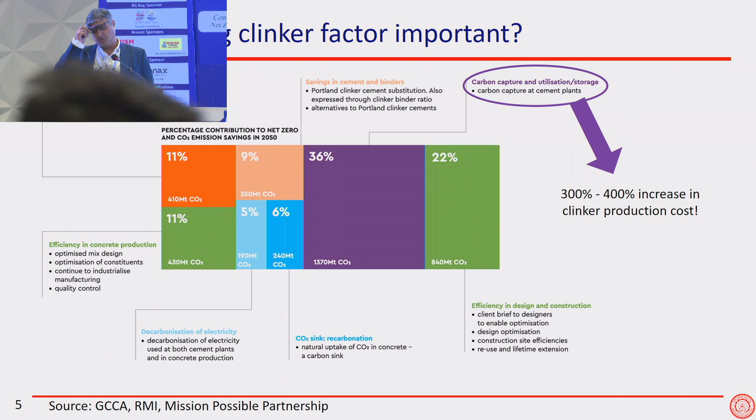We do not want to rely more on CCUS. We'll have to have CCUS, but to reduce our dependence on it, we'd have to have lower clinker content in our cements, because sustainability is important. But if we reduce clinker content, we increase the risk of carbonation and corrosion. We may have problems of durability, and structural safety and durability are more important, even though sustainability is important. So let's see how we can balance the two and achieve a good approach.

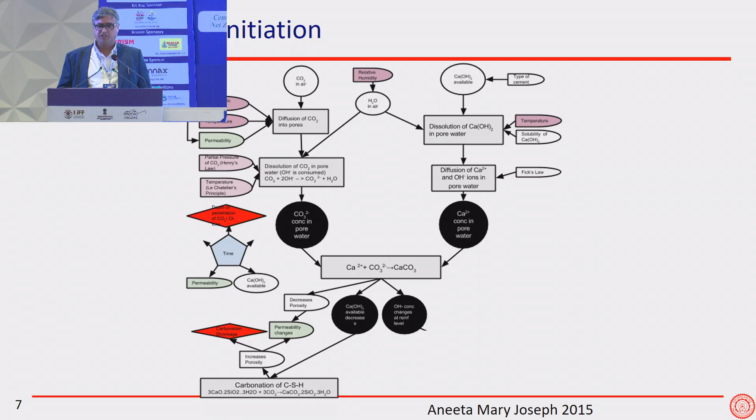When we started working on this issue, around the time we were starting the LC3 project, I had been thinking of trying to model all of these deterioration processes in concrete, because modeling is what I really love to do. So I told one of my students, go and draw me a simple short graph of what carbonation is, how carbonation happens.

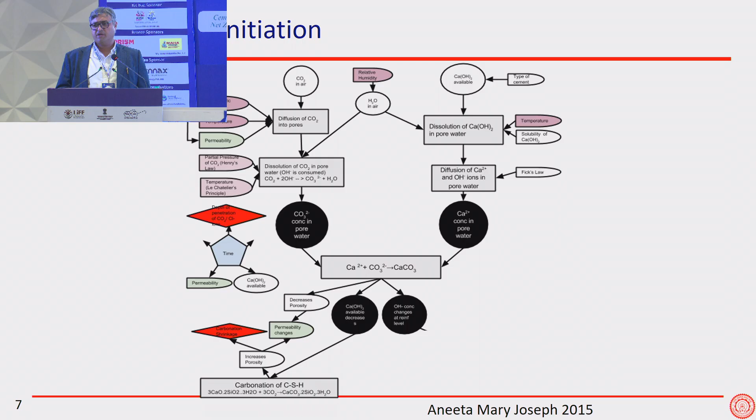She went away and did not come back. I kept calling her, she did not come back. She came back after some time and gave me this very complicated graph. I'm only showing you half of the flow chart, not even the other half. It's a complex process -- this is what I realized.

I used to think this is something very simple: CO2 goes in, reacts, and that's it. But then we realized there are so many steps to carbonation. There's diffusion of carbon dioxide, dissolution, reaction, diffusion of lots of other things including moisture, and precipitation of carbonates. Lots of things can happen.

CO2 goes in through the pores because CO2 likes to fly, it doesn't like to swim. If you have a bottle of Coke and you open it, the carbon dioxide escapes, which means carbon dioxide would not like to remain within water -- it would like to escape. It goes through the air and goes inside the microstructure only through the unsaturated pores.

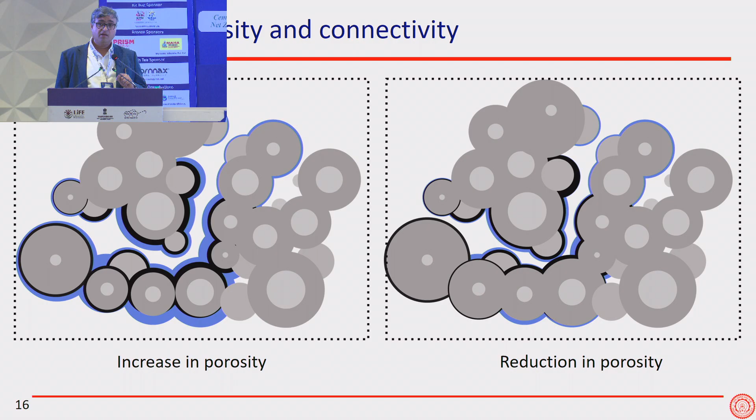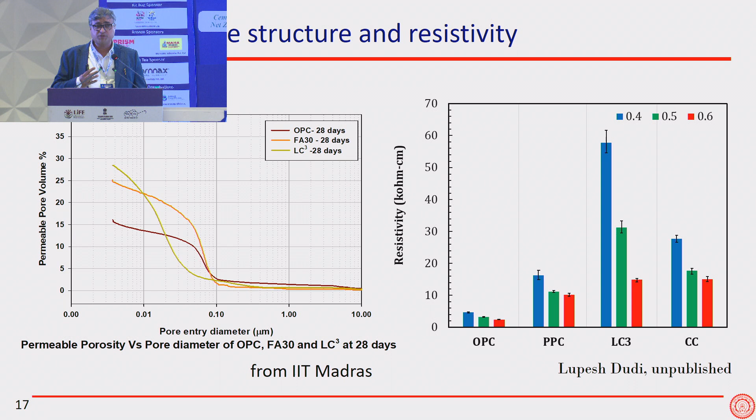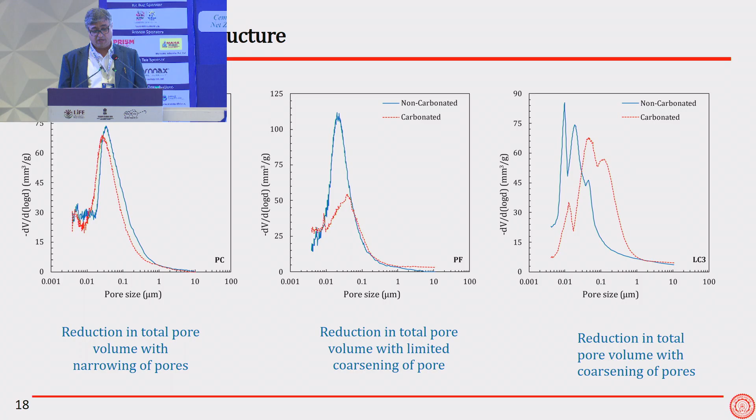Now, when we talk about these blended cements, be it fly ash-based cement, PPC, or LC3 or composite cement, we know that the permeable porosity of these cements has a finer pore size. The resistivity of concretes made using these cements is high. But after carbonation happens, these pores become coarser. This is something we have to clearly understand. Pores become coarser in all blended cements because of the process we've just talked about.

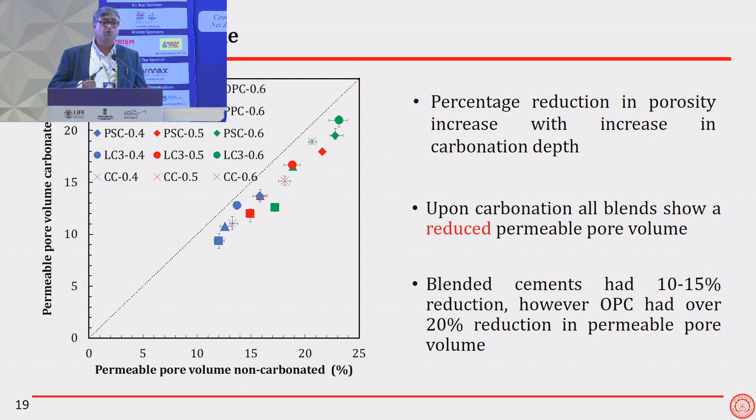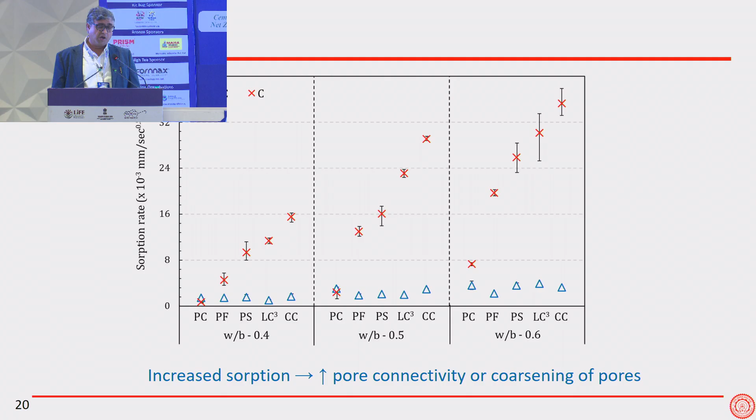Even though the total permeable porosity might reduce, because of the change in the microstructure you get more connected pores, and the carbon dioxide may be able to go in more easily. Because the pores are better connected - compare the blue ones with the red carbonated ones - the water gets in more easily, the air gets in more easily into the concrete after carbonation.

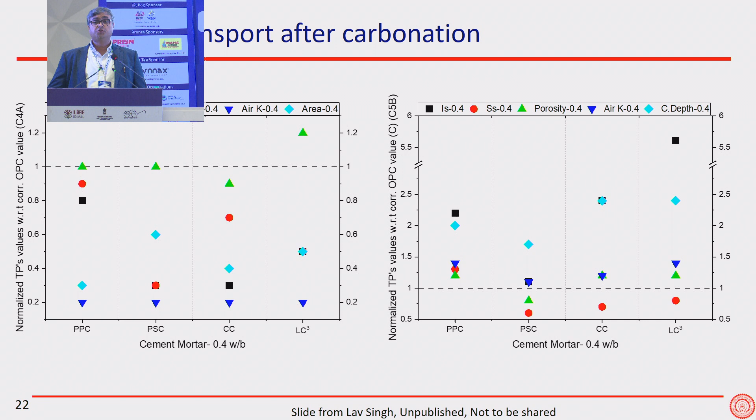So we need to take care of that, which means all of these blended cements on the left, when they used to have lower transport properties before carbonation, after carbonation the transport properties can be higher than OPC. That means all of our experience of 200 years of OPC is a waste. We cannot extrapolate from that experience to design our structures using blended cements - any of them, even PPC by the way - and because the corrosion rate is going to be higher as well in that case.

Now, something very simple that all of us know about, but don't practice so well, is the control of water to cement ratio. Here you see 3 different water to cement ratios in the vertical graph: 0.4, 0.5, 0.6. You have the different cements on the y-axis, and you see that if you reduce the water binder ratio, you would be able to reduce the depth of carbonation. That is something very important.

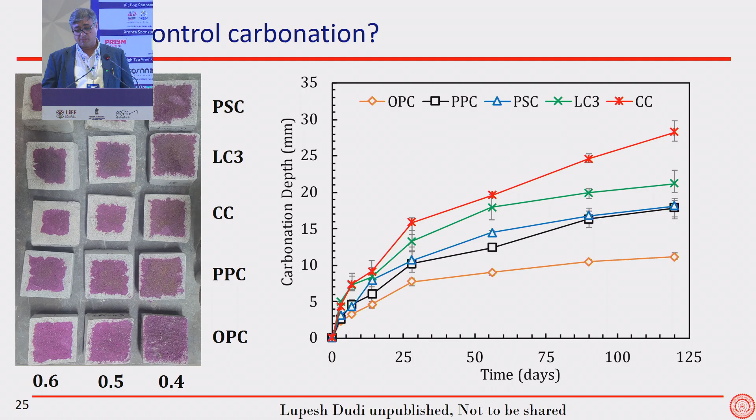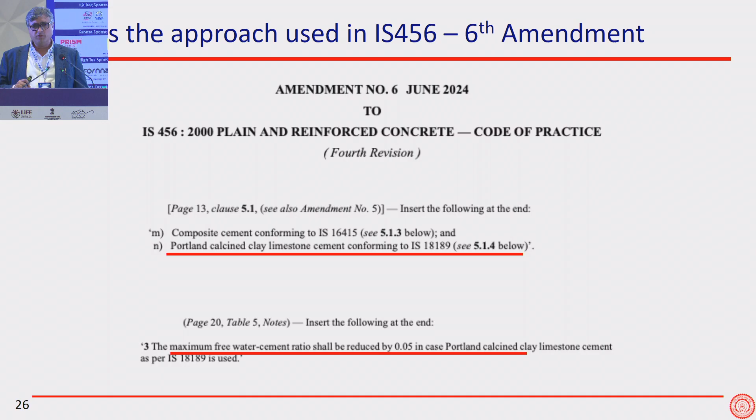That is a simple way in which you can control the depth of carbonation in any blended cement, which is why when we amended IS 456 to include limestone calcined clay cement, and now I feel it should be there looking at the data for composite cements too, we asked that the water to binder ratio be reduced by 0.05. I must tell you frankly that the current recommendations of water to binder ratio in IS 456 are good. The problem is our current construction practices do not always meet those requirements. The standards try to be on the safer side most of the time, which is why we have to reduce this. If you just take the values given in the code and follow them religiously, you're not going to have these problems. But because we do not follow them religiously, we have to do things like this.

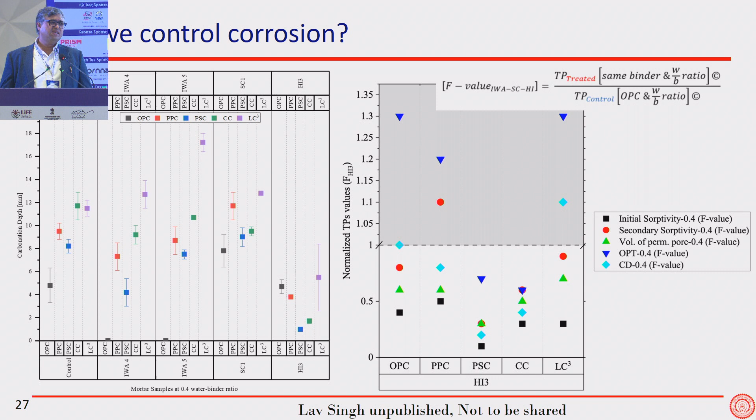But there are other ways of solving the problem of potential corrosion or carbonation as well. Here we are showing some results using different waterproofing compounds. Our idea was that if you have low clinker cements which get carbonated faster, if we can mix waterproofing compounds and prevent moisture from getting in, at least we can protect against corrosion. That's what our idea was. But then after we mixed in these waterproofing compounds, we found that even the carbonation reduces.

So with some of these waterproofing compounds, after the concrete cures a bit - 10 days, 15 days, a month, whatever - you come with a brush or a roller and apply this compound on the surface. This could be a hydrophobic compound, for example. Just apply this on the surface of the concrete, and carbonation depth reduces.

And the carbonation depth reduces because even for carbonation, you need moisture. You have to have a layer of moisture around the cement particles for it to dissolve and react with the carbon dioxide, and even that process is slowed down. What you notice is not just the carbonation depth reduces, but because you're reducing carbonation, you're also reducing all the other transport properties in the concrete, which means that by a simple application on the surface, we can get a concrete that is durable in carbonation conditions.

We can go down to those low clinker factors safely. But then a lot of this work has been done in the lab and not in the field. We wanted to see what's happening in the field. So we were very fortunate.

We had an old building on the campus, 50 years old, that we were going to demolish. So what we said was - I asked my student to stand inside the building when it was being demolished. No, not really. But I asked him to take samples from there and measure the carbonation depth. Most of the concrete was fully carbonated, at least beyond the reinforcement.

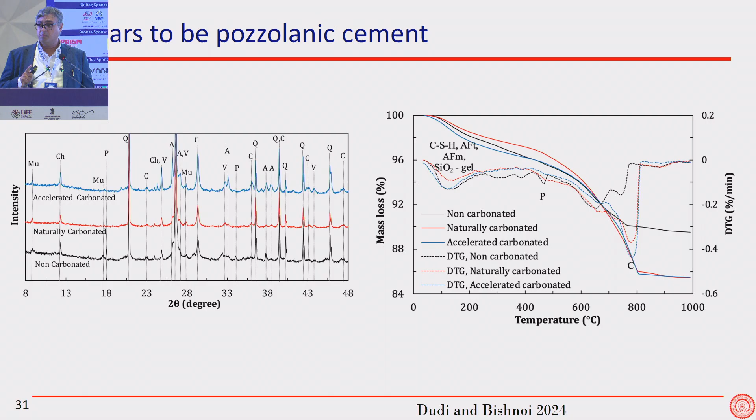Despite all of the concrete being carbonated, only at 20% of the locations was there actually corrosion. So what Lupesh did was take out samples, measure half cell potential and rate of corrosion, but he actually also took out the reinforcement to see if it had actually corroded after 50 years of service in Delhi. Delhi has some of the worst climate, well, worst climate full stop, but worst climate for carbonation as well.

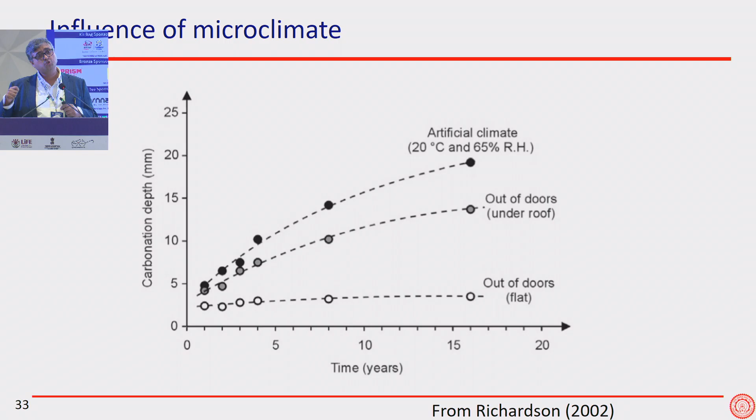So we also found that it all depends on the microclimate. We were able to identify which locations in a structure suffer the most from the risk of corrosion. We know this kind of graph already, so I'm not going to spend time on that, but the microclimate is what is important.

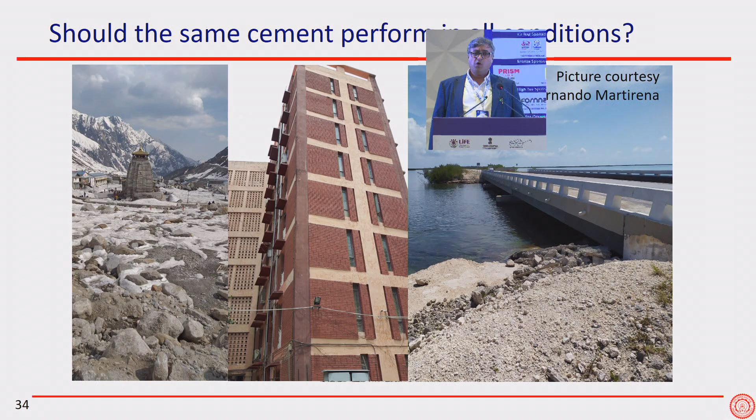Now, I said that safety is important, durability is important. Yes, it's important, and we need to find solutions to all of that. I think we have solutions to those things, but there is one more thing we really have to think about: do we really, if we want to achieve sustainability, want to use the same type of cement everywhere? Do you wear the same clothes when you come to this meeting as when you go to sleep?

No. Do you use the same kind of vehicle when you want to exercise as when you want to transport yourself, or when you want to travel to America versus when you want to come to Yashobhumi? No, you don't. You use different products for the same industry for different things. The cement industry and the engineers have to become smarter in that way.

On the left, there's a picture of Kedarnath. We had a project there, if you know about it, the Adi Shankaracharya Samadhi that was made there, supported by JSW Cement at that time, and not just JSW Cement but the whole group. There, the requirement is freeze-thaw resistance. The next building in the middle, the horrible one, has been in the terrible weather in Delhi. The one on the right is a beautiful bridge that goes to these beautiful islands in Cuba, exposed to chlorides. Should we use the same cement everywhere?

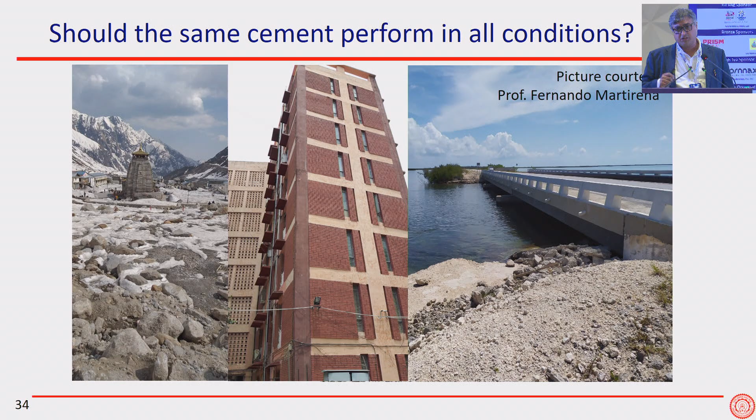Even in the same house, should you use the same cement in your foundation as you're using in your drains? This is a question we have to ask, because if we have to get to sustainability and reduce the clinker content, we have to have solutions for specific applications. We know that all of these blended cements, they're very good in some conditions, but can be worse in others. For example, they're very good in chlorides, so we should start using them in chloride conditions. Engineers are supposed to know what to use where. You're not going to put a beam where there's a column.

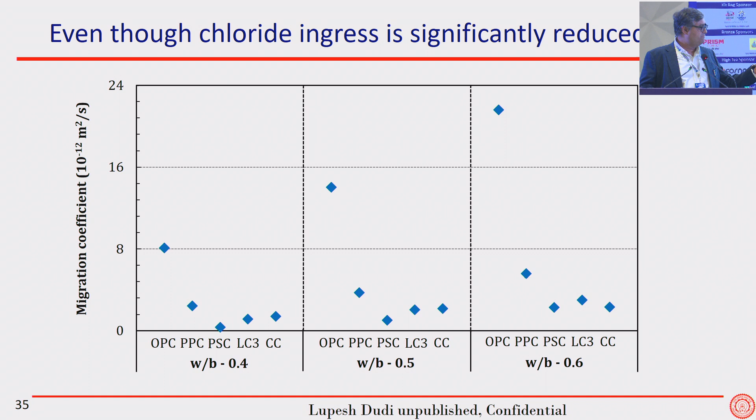I'm finished. 20 seconds? 20 minutes? Okay, seconds. So, should we worry about carbonation?

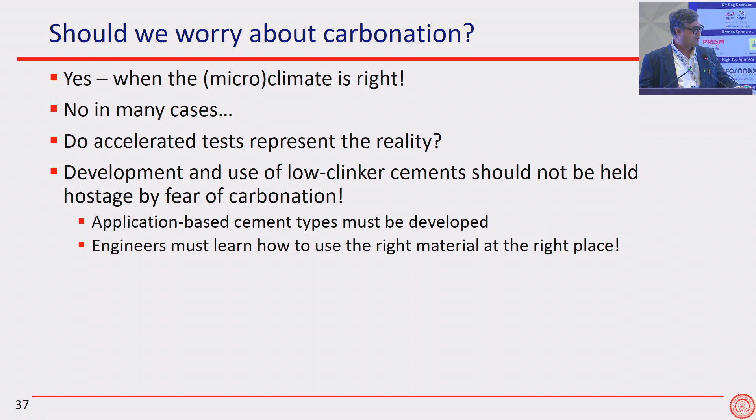Congratulations, it was as usual a fantastic presentation. Thank you, maybe this one was even better. Oh really, okay, really impressive. Thank you so much. I matured well, I think.

It was a very nice presentation, and as a keynote speaker you covered carbonation, its impact, porosity, the relations, and also with blended cement, what can be the impact of carbonation and how to get rid of using that. One thing that was very important, I have seen that to reduce the impact of carbonation through waterproofing. So I want to understand in detail, if you can, maybe after this session.

I have a guy called Love Singh sitting here. Love, raise your hand, taller. So Love Singh is the guy who did all the work. Yeah, so hire him to...

So just one question: if we want to reduce carbonation with the help of waterproofing chemicals, what is the reactivity happening, and how can you avoid carbonation with the help of this waterproofing chemical?

This is something that may take a longer discussion. We could not understand it at first, but we've recently seen literature from Maruyama in Japan. What they're showing is that you have to have the right relative humidity even for carbonation to occur. So if you're able to subdue the relative humidity, you can even reduce carbonation in concrete, and the pH remains high. This may be related to that, but we were very surprised at the results.

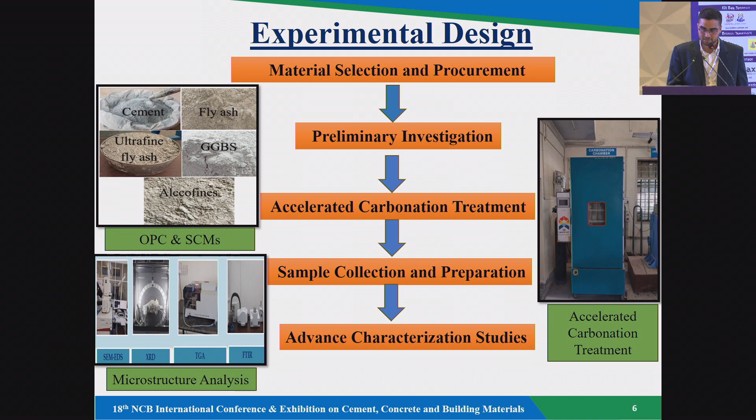In this study, we have taken fly ash, ultrafine fly ash, granulated blast furnace slag, and Alccofine, the finer version of GGBS, followed by accelerated carbonation treatment, and performing certain microstructure analysis and phase quantification. The materials used here follow the Indian standards from OPC to Alccofines.

The experimental work is as follows. The carbonation curing regime is followed by certain standard references, and we performed advanced characterization studies using scanning electron microscopy, energy dispersive X-ray spectroscopy, Fourier transform infrared spectroscopy, and thermogravimetric differential thermal analysis.

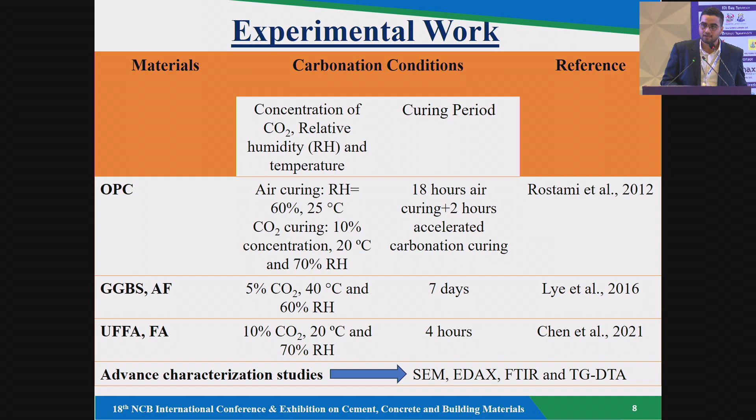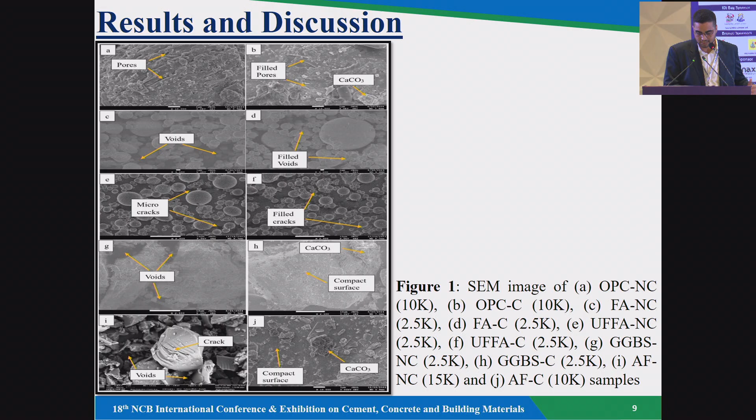The results and discussions are as follows. These are the SEM images from A to J, showing certain carbonated and non-carbonated SCMs. We can observe that in the case of non-carbonated samples, there is an irregular and non-uniform surface with certain voids observed, whereas for the carbonated samples, the presence of tobermorite or CSH as well as CaCO3 is predominant.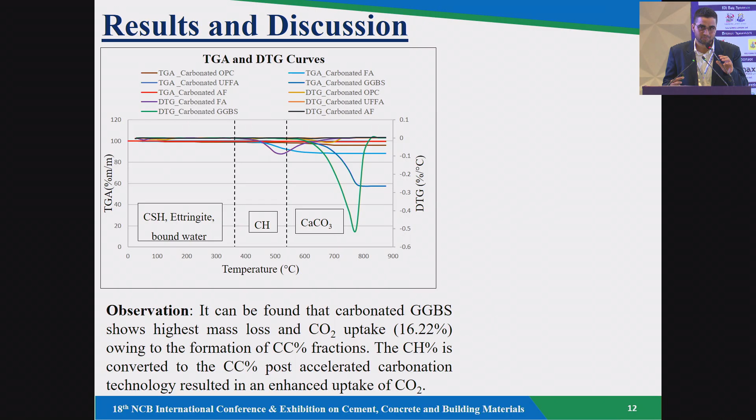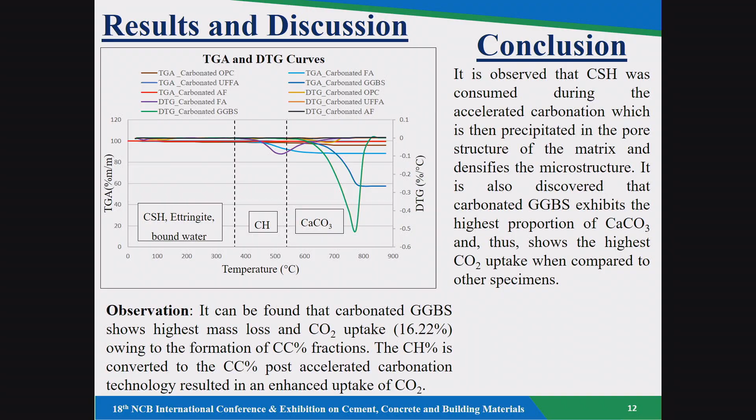Now the conclusions. Following all these microstructure analyses, it has been observed that the CSH was actually consumed during the accelerated carbonation and converted to calcite phases, be it calcite, vaterite, aragonite, and all these phases densified the microstructure. It has been discovered that the carbonated GGBS exhibited the highest proportion of CaCO3, resulting in an enhanced CO2 uptake of the developed composite. Thank you.

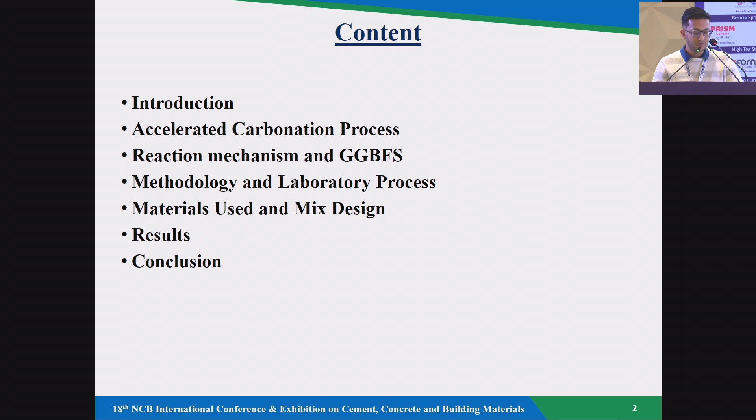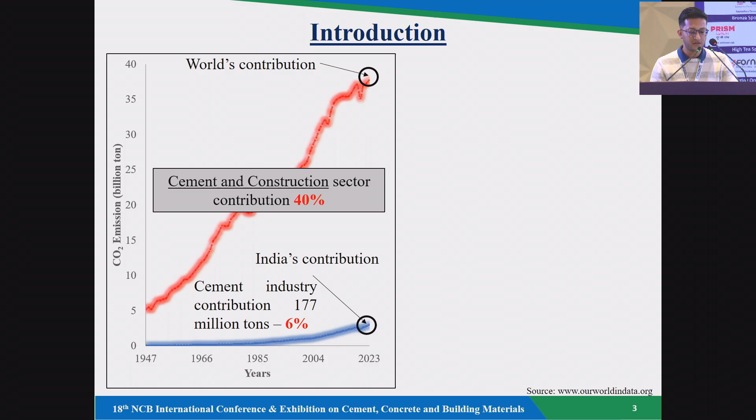As we know, the CO2 emission has been on an increasing trend with rapid urbanization. Currently, if we talk about the cement industry only, the world contributes about 38 billion tons, whereas in India the cement industry contributes 177 million tons, which is approximately 6%. If we consider the construction sector along with the cement industry, the total CO2 emission contribution is 40%.

So in light of some targets in various forums like COP21, the Race to Zero campaign, and COP26, we need to minimize the CO2 emission. So we need to have some mitigation techniques.

If we don't use the mitigation techniques and we follow the same trend, by 2050 we will be having 2.34 gigatons of CO2 emission, and with mitigation techniques we can limit it to 1.5 gigatons. So what are the mitigation techniques?

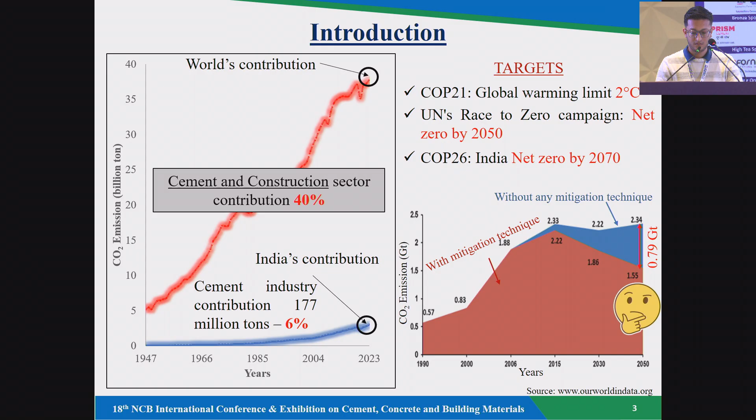There are some mitigation techniques like alternate fuels and raw materials, improving efficiency of cement rotary kilns, supplementary cementitious material, and carbon capture and utilization. Among these, CCUS has been identified as one of the major efficient mitigation techniques which can reduce the CO2 emission.

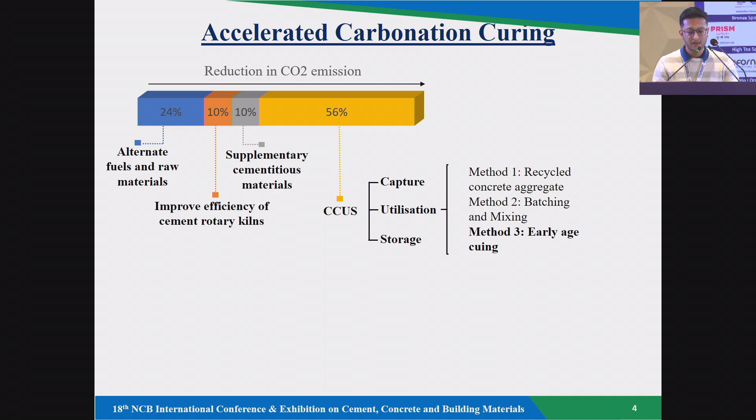CCUS in concrete can be used in three methods: in recycled concrete aggregate, batching and mixing, and early age carbonation curing. So I will be talking about accelerated carbonation curing, which is also known as early age curing.

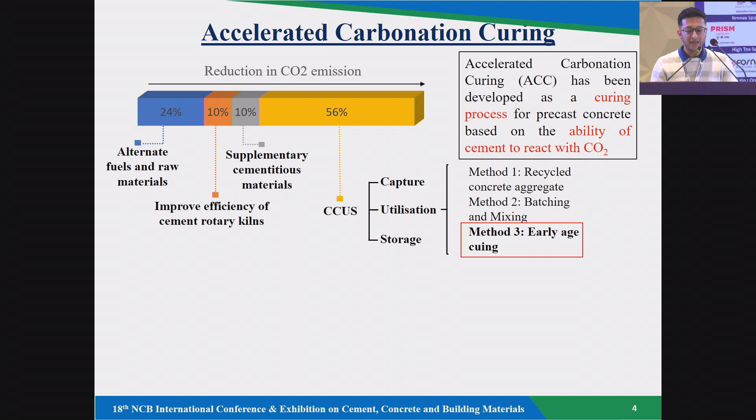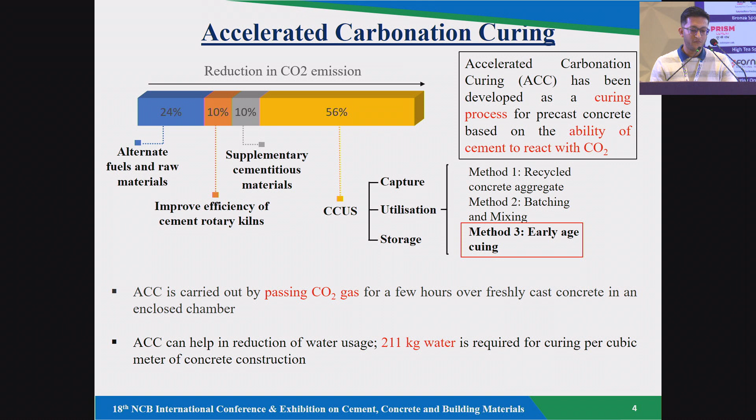Accelerated carbonation curing has been identified as a curing process for precast material in which CO2 is basically exposed to freshly prepared concrete. By using the accelerated carbonation curing procedure, we can also reduce the use of water, as we don't have to use it for water curing as well.

So what is the reaction, how is it different from water curing and CO2 curing? In water curing, the major products are CSH gel and calcium hydroxide, whereas in CO2 curing, the unhydrated and hydrated compounds, when reacting with CO2, give us CSH gel and calcium carbonate.

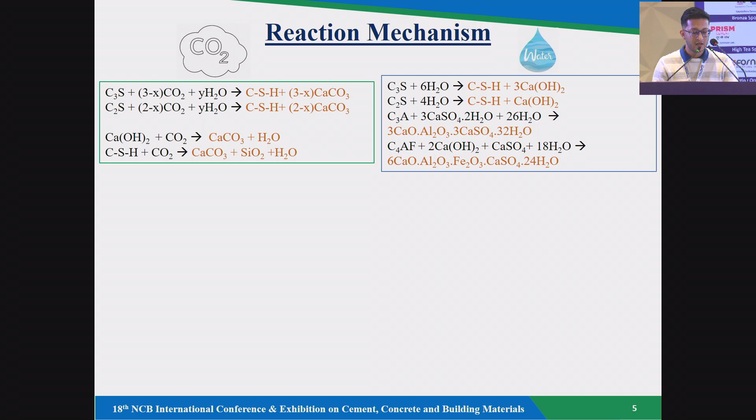Also, one objective of using SCM is that efficient use of SCM will diminish the carbon emission associated with Portland cement. Another objective is to minimize environmental effects such as waste, by efficient utilization of industrial solid waste.

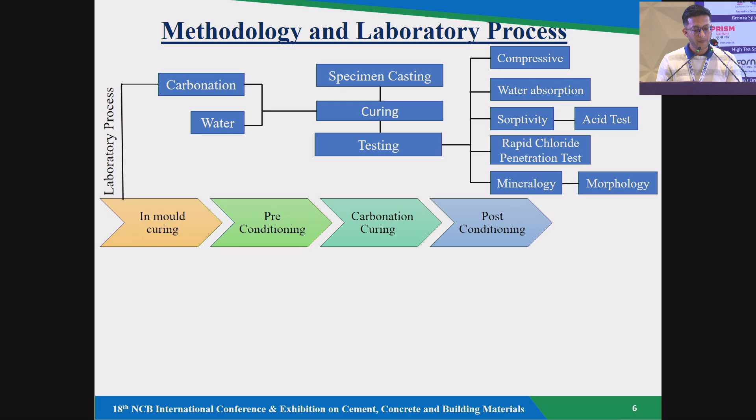The methodology adopted: specimens were casted, and two types of curing were given—carbonation curing and water curing. Some basic tests were done like compressive strength, water absorption, sorptivity, acid test, rapid chloride penetration, and microstructure testing like mineralogy and morphology. In carbonation curing, the laboratory process followed 4 steps.

First step was in-mold curing, then preconditioning, followed by carbonation curing for 12 hours, and then post-conditioning. In post-conditioning, 3 days of water curing was given, followed by sealing in plastic wrap till the testing age.

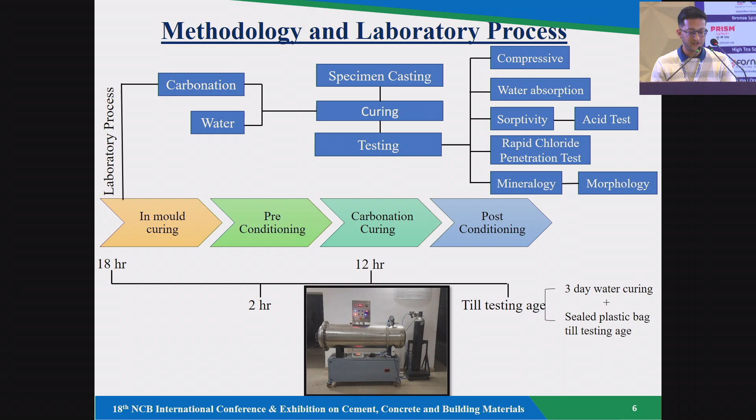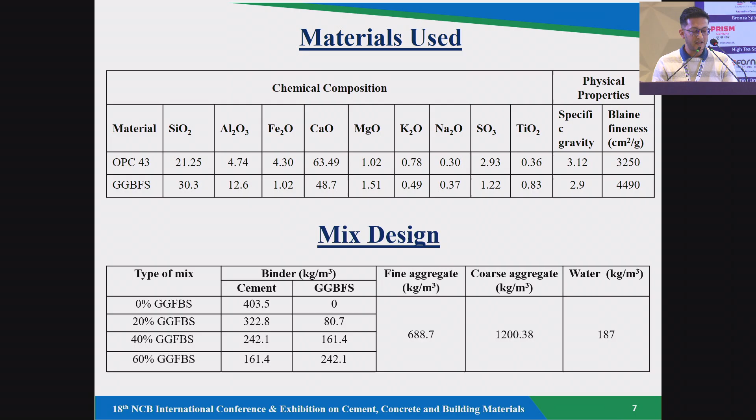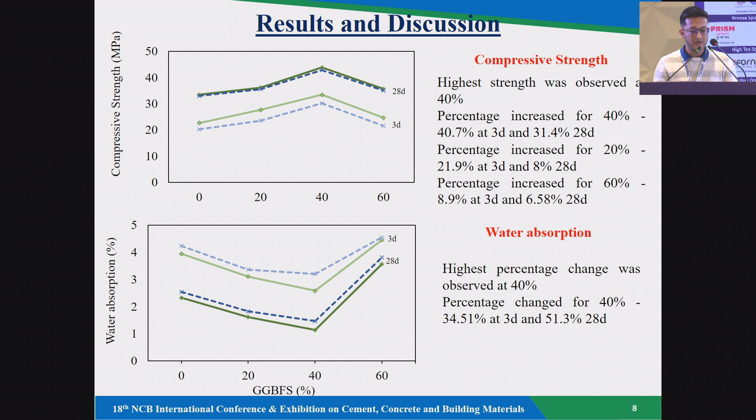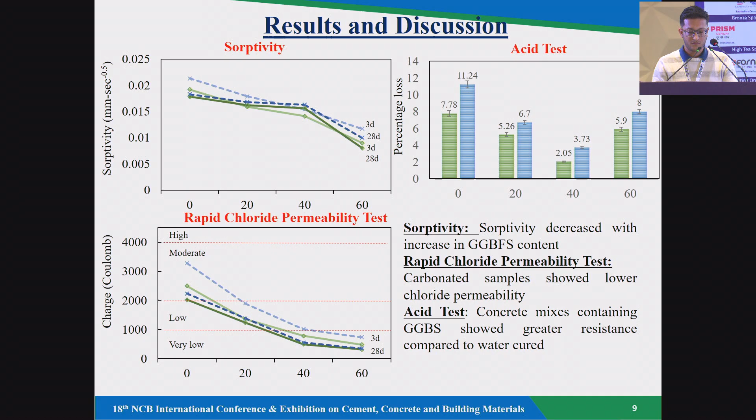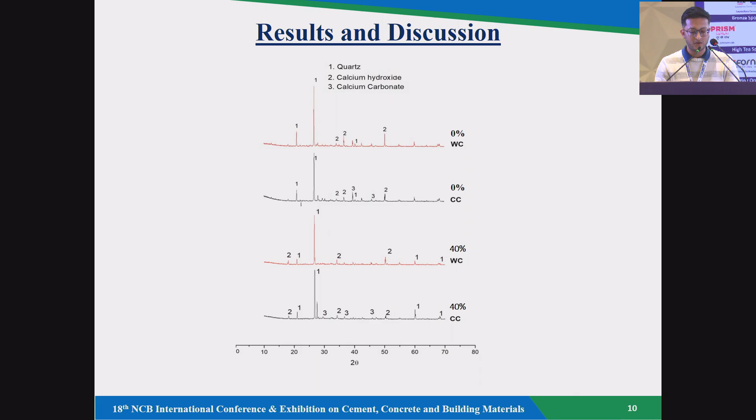In the XRD results for microstructure, we tested the 40% GGBS mix. It shows calcite peaks in the carbonation-cured samples as compared to water-cured samples. In the morphological testing, calcium hydroxide was observed in the water-cured sample, whereas in the carbonation-cured samples, a denser microstructure with calcium carbonate was observed.

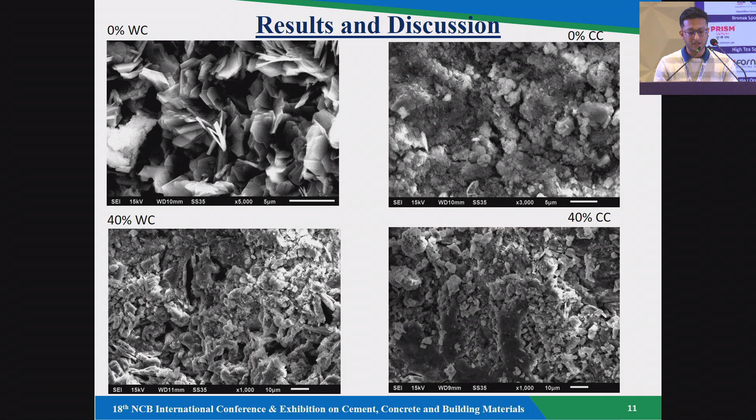Conclusion: the highest strength was found in the 40% replacement. Therefore, it can be said that 40% was the optimum replacement level of the GGBS in the concrete.

Water absorption of carbonation cured samples was lower than the water cured samples at all ages. Chloride permeability of carbonation cured samples was significantly lower than the water cured samples.

In the microstructure, the calcium hydroxide phase was reduced significantly, while there was a considerable increase in the calcium carbonate phase, as indicated in the XRD test. A denser microstructure was observed in the SEM images of the carbonation cured samples.

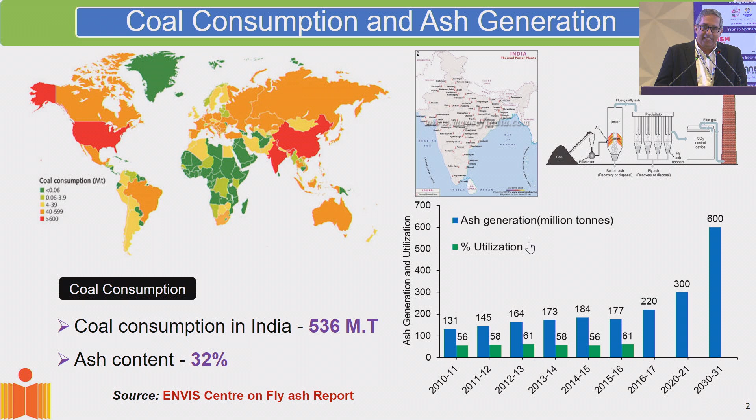It's the best way to produce power, and so we're going to produce a lot of fly ash because of that. Now the question is, even the fly ash that we have, are we using it effectively? Which means we need to understand what fly ash brings to the table.

Now, what we did is we collected fly ash from different sources across India and did the oxide analysis. The oxide analysis reveals that the composition is primarily similar. If you just go purely by the oxide composition, it's going to be very similar across the different fly ashes. You can't pick out the differences.

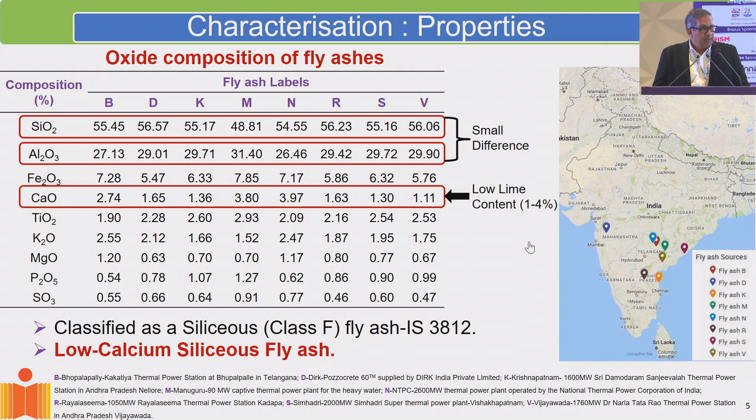Typically, our fly ashes contain very low calcium. This has consequences, as I'll explain a little later.

But then from the known stoichiometry, you can actually determine the crystalline phases like mullite and quartz, in which silica and alumina are present in crystalline form, predominantly in a non-reactive form. They have known stoichiometry, so you can subtract out the amount of silica and alumina present in those forms, and determine the reactive oxides that are present in the glassy phase of fly ash.

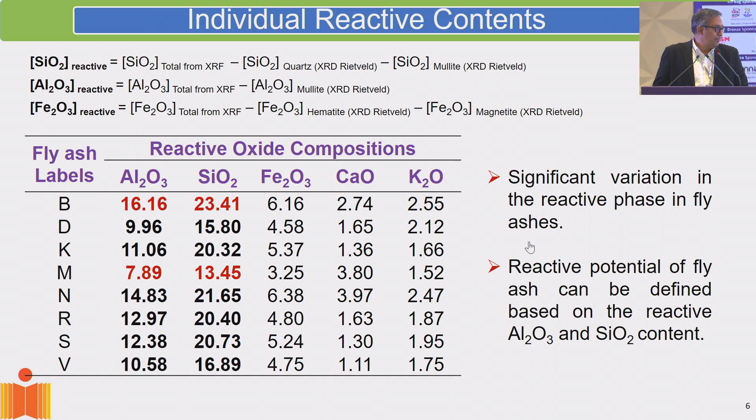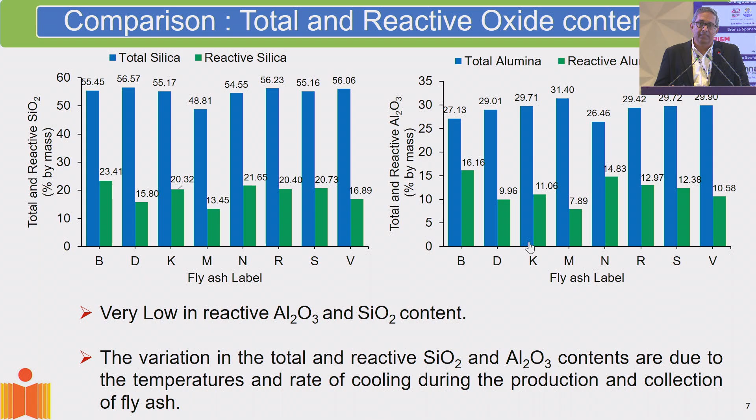Now, the reactive part is what we're interested in. That's what we can count on if we're going to do any kind of replacement reaction. The other thing is, if you're going to do alkali activation, it's the alumina that plays the key role, particularly when we're talking about geopolymers.

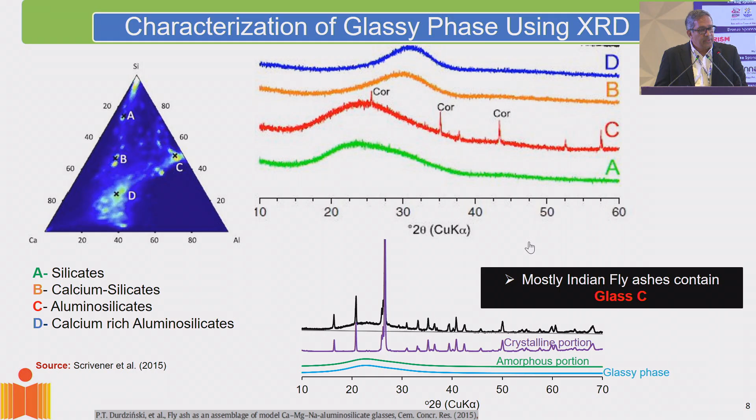This is what you would see in slag. The glassy form present there is actually quite reactive, and you don't need to put in effort to extract the reactive species from that glass.

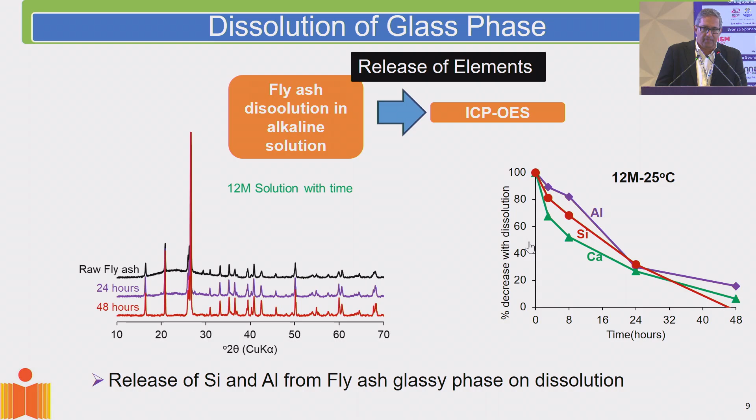So, coming to aluminosilicate binders with fly ash, what do we do? We dissolve the reactive silica and alumina into the solution. Then basically we form geopolymers, which are cross-linked silica-alumina chains formed in the system.

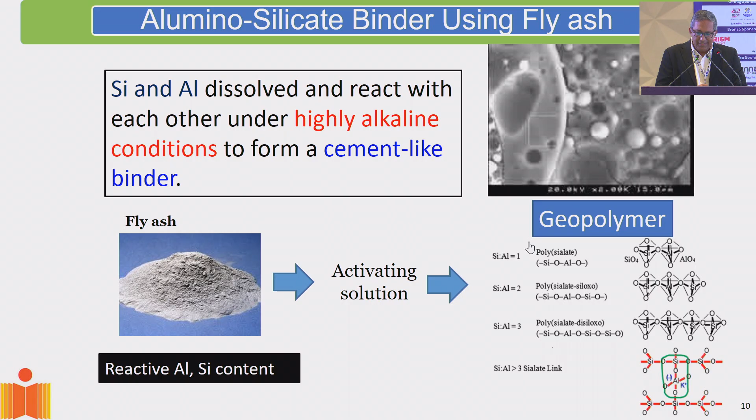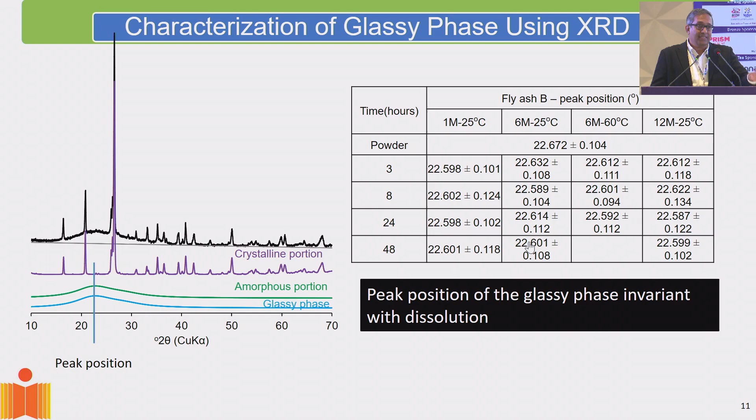One thing we found with the dissolution of the glass is that if you look at the XRD analysis of the dissolving glass, the characteristic of the glass itself doesn't change. The XRD signature of the glass with dissolution does not change, and that's something we've established, so you could actually continue to use XRD to quantify the glass in a partially dissolved case of fly ash.

Sodium silicate contributes silica and sodium to the system. Sodium hydroxide contributes sodium to the system. And then, of course, you have water that balances the pH of the system.

Now, what you get in a geopolymeric system is much more complex than what you see in a cement paste, because in cement paste you only deal with water-to-cement ratio. What you have here are reactive ratios: silica-to-sodium ratio, alumina-to-sodium ratio, in addition to the molarity of sodium hydroxide. So you have to play with all three to figure out the optimal ratios based on the reactive content coming from the fly ash.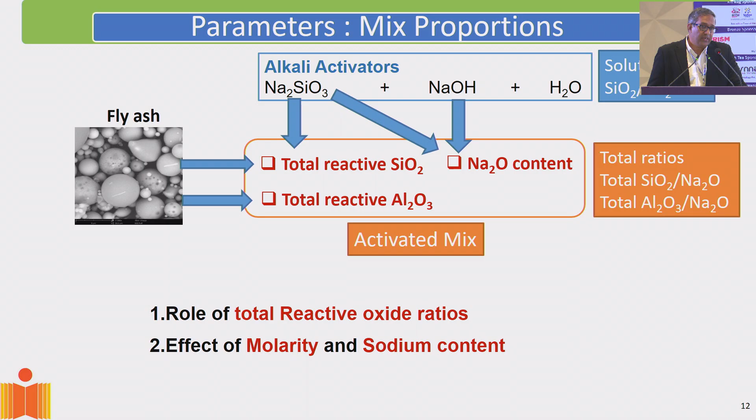If you do that, what we found is that for the reactive silica-to-sodium ratio, these lines represent different ratios varying from 6.55 to 2.66 — the 2.66 is on top, the 6.55 is the line at the bottom. The geopolymerization was performed using sodium hydroxide solutions of different molarity.

What you find is that if you increase the molarity beyond 3 molar sodium hydroxide, it really doesn't make any significant improvement. So you really don't need a very high molarity solution like what people have used in the literature — you don't need 14 or 15 molar sodium hydroxide. You can manage with 3 molar.

And the optimum ratio of reactive silica to sodium in the system is anywhere between 4.72 and 2.66. That is basically the optimal ratio that will give you the best-case strength from the system, where you use up all the reactive material in the fly ash.

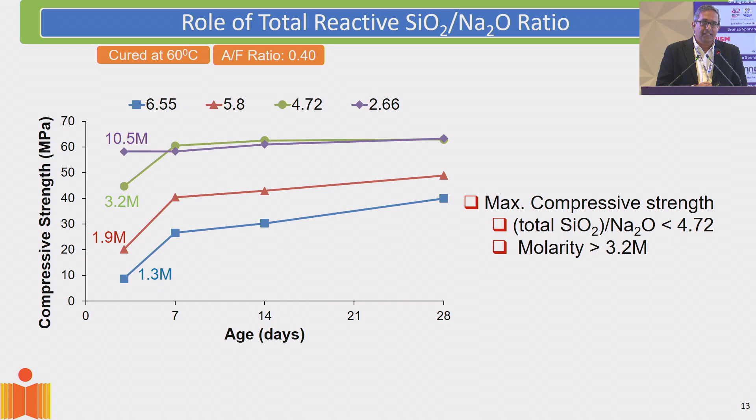So with this, we can actually formulate idealized mixtures based on the composition of the fly ash, where the fly ash is used effectively, utilizing all the reactive species in the material.

So with that, I'd like to thank you for your attention, and I know Christophe can't wait to chase me off the stage. That's perfect. Thank you so much, Gulu. Really appreciate it. That's fantastic.

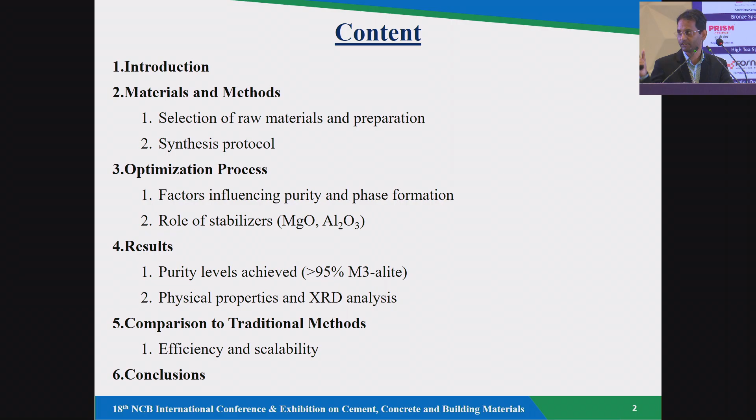The results show we have developed more than 95% pure M3 polymorph of alite along with physical properties. Although we have done FTIR, SEM, XRF and other studies, I will cover here only the XRD analysis, followed by comparison to the traditional method, regarding efficacy, efficiency and scalability, and followed by conclusion.

As an introduction, it is basic that alite is the major phase which covers about 50 to 70% of cementitious mass, and is found in 7 forms: T1 to T3, M1 to M3, and rhombohedral. The crystal chemistry and polymorphs depend on the dopants used during the sintering process at higher curing temperature, and according to the binary phase diagram, which I will discuss later, the formation of alite generally takes place at temperatures more than 1250 degrees centigrade.

In the past, different dopants have been used, such as magnesia based, alumina based, and iron based, which play a role in stabilizing specific polymorphs. Therefore, this study addresses the challenges we faced in stabilizing M3 polymorphs of alite for mass production, up to 4 to 5 kg of this M3 alite phase.

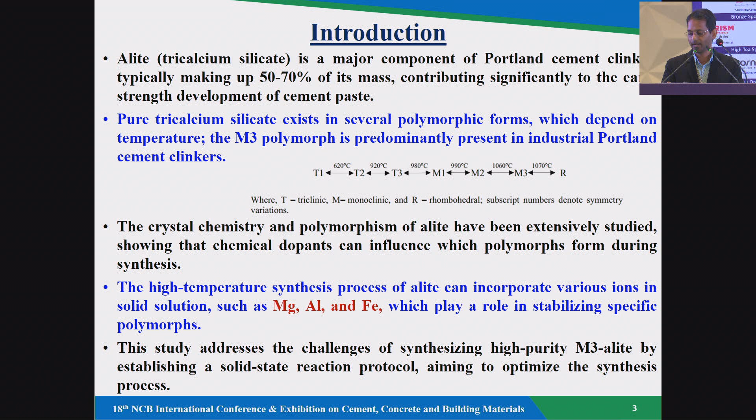As I was discussing earlier, the formation of different polymorphs such as alite or belite depends on the phase diagram, in which as we move towards the right, the calcium to silica ratio decreases, and C2S or CS based polymorphs form. Our concern was towards the left side, as the formation of C3S, the M3 phase, was our target, and that target was achieved by addition of MgO and Al2O3.

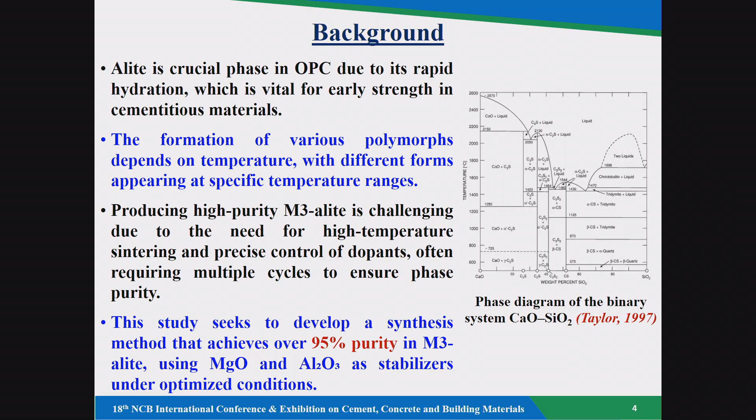This study undertakes the development of the synthesis of M3 alite using the solid state sintering process, which was done up to 7 hours, and we have developed about 1 kg of that M3 phase of alite within 7 hours, with sintering time up to 7 hours, dwell time of 4 hours, and a ramp rate of about 8 degrees centigrade per minute.

As raw materials, we have taken pure limestone with purity more than 98% and silica fume with purity 99%, which was the key factor, because if the purity is less, and pure analytical grade of these two materials is doped with, say, P2O5 or something else, the formation of beta phase, the C2S phase, will occur. So we took highly pure raw materials along with MgO and Al2O3 based stabilizer for material preparation.